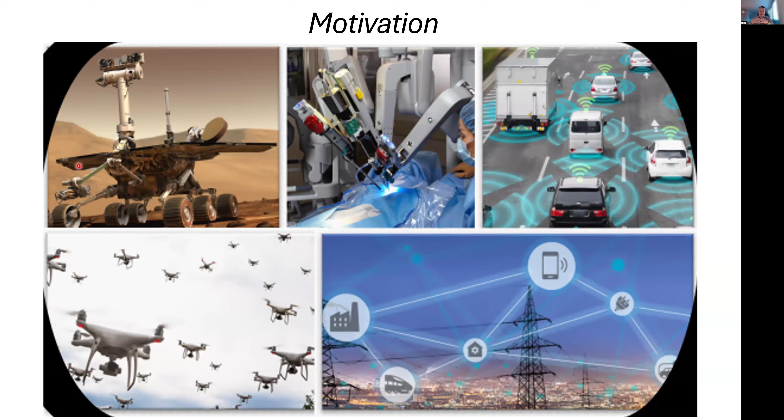So to start with the motivation: modern engineering systems are becoming more and more complex, penetrating through everyday life. There's a certain requirement where safety critical systems need formal guarantees when we design their controllers. These systems may be fully autonomous or semi-autonomous. They may cooperate with themselves, for example in an industrial plant, where you can educate your workers to cooperate with autonomous machines such that the machine can expect the human operator to behave a certain way.

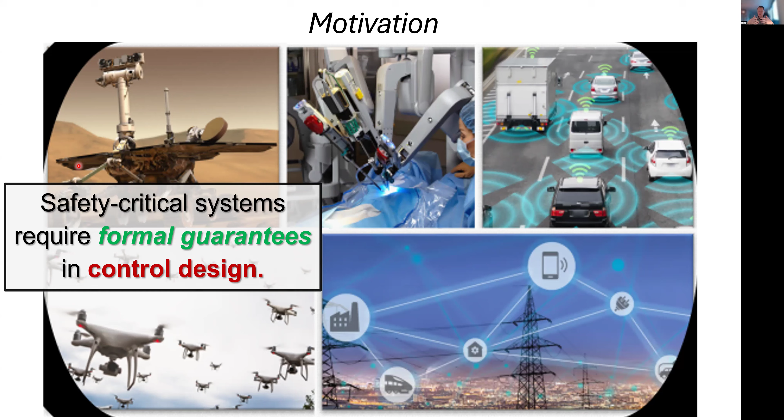Or it can just be a traffic network where you cannot expect cooperation. But in all of these cases, you want your autonomous system to safely operate in the presence of humans.

So the way I see it, to really achieve safe autonomy, there's a certain road, and I believe this is correct for most safety critical controls. To start with, everything begins at the theoretical foundations, and hopefully studying theory well gives us a design framework. Implementing these frameworks for particular problems and solving some computational issues, we get data. At the end of the data, I believe we'll see some gap between what we expect from our theoretical assumptions and what we actually get in practice. But I believe this is not a weakness, it actually gives us an opportunity to improve our design, so we can always go back to the theoretical foundations. So I believe this road is not actually a direct circle to safe autonomy, but rather a spiral with multiple iterations.

My talk will also reflect a similar structure. In the contents, I'll briefly talk about the theory, what I mean by the theoretical contribution. This is going to be formal safety and how we can verify this using control barrier functions. In the implementation side, I'll briefly talk about safety filter controllers, implemented on autonomous trucks, which give us a really good platform to show characteristics that we may see in any other autonomous system.

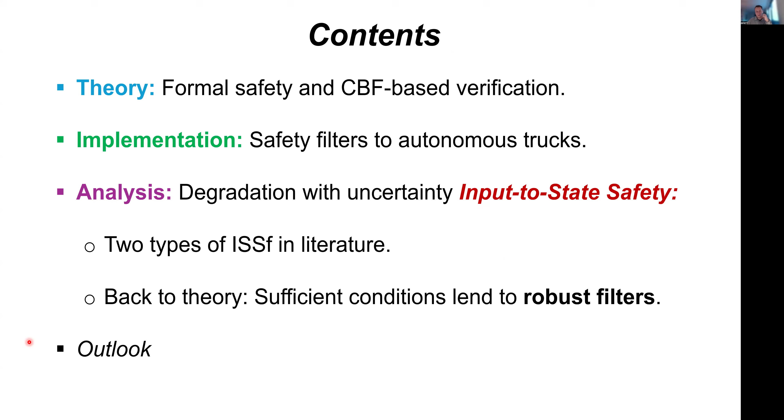So let's start with the theoretical foundation. We're going to talk about safety, so let's first settle down what we mean by that. We have this nonlinear system, and we work with continuous time systems. We have a set of initial conditions and also an unsafe set that we don't want to enter.

This is kind of a sanity check, making sure that the initial condition and the unsafe condition obviously cannot share some certain space. I'll name the solution of this closed loop system x of t, starting from a given initial condition. So the most basic safety definition is: for any point in the initial set, if throughout the whole realization of the trajectory you do not visit any of the unsafe states, then this is considered safe. But recently, a more function-based safety definition is becoming more popular, because if we can find a function that defines a certain set, we have to be careful—this certain set has to be a subset of the initial set.

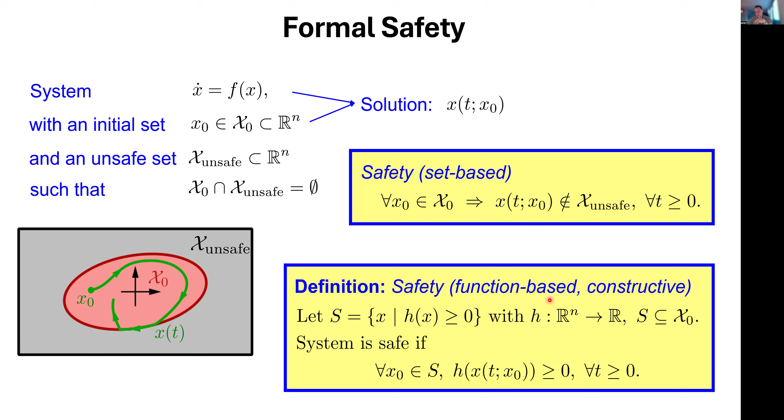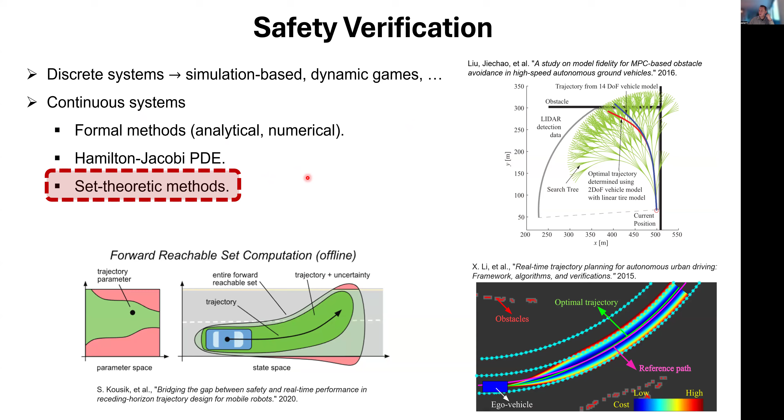Safety verification is a very well-studied topic in control. There are a lot of ways people try to crack this problem. In my research, I relied more on set-theoretic methods. What I mean by set-theoretic methods is when we study the properties of a system without having to calculate any of those trajectories, if we can get an idea whether the safety can be guaranteed or not.

Just by checking some certain property of the model, then we are in the set-theoretic field. This field was kicked off by the seminal work of Nagumo. You might have heard of it before in the context of safety critical control. It's very popular and basically formulates a very intuitive understanding. What it says is, on the boundary, if we can calculate these tangent cones, and if the system model is in the tangent cone for all the boundary points, that means the system trajectories cannot leave the boundary. So it has to go either inward or be along the boundary.

So this naturally leads to safety. This is a verification method, and throughout time there are other modifications to this theory: with the viability theory in the 90s and early 2000s, we have the barrier certificates that are very popular with hybrid type cyber physical systems. Eventually this leads us to all the developments in the 2010s with the control barrier function, which is now kind of consolidated under this brand name. So I'll talk about control barrier functions a little bit.

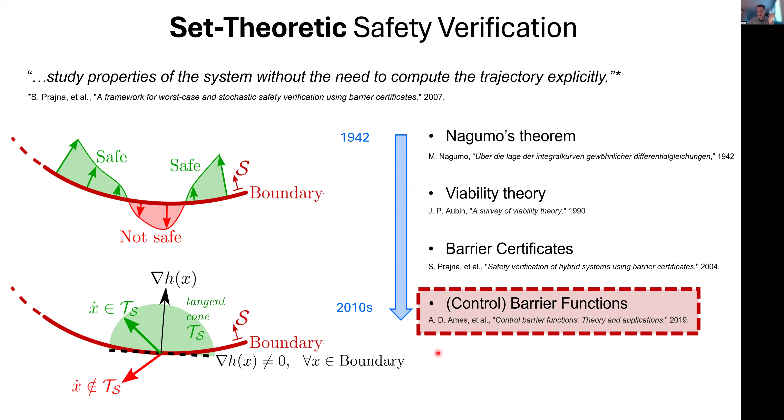The key idea is actually inspired by Lyapunov functions, where we have this positive definite function. If we can find a certain condition on the time derivative of this function with respect to the system trajectories, in particular if we can upper bound this, then we know that exponentially the system trajectories will approach the equilibrium. So this is the main idea.

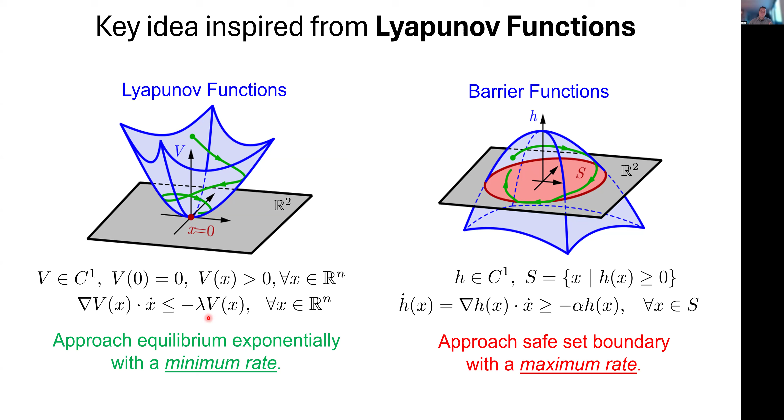What we can do is borrow this idea for the barrier function as well, with a slight modification. So instead of this positive definite function, you can think of it like flipping the function and moving it a little bit so that you create a set. The key thing is we can still use this function h such that if we can lower bound the time derivative of this function along the system trajectories, now what we can say is we allow the system trajectories to approach the set boundary, but at a maximum rate, and that maximum rate is diminishing. So at the very boundary, the system trajectory can either stay on the boundary or has to go in. This is the smart way of enforcing such a condition using the gradients.

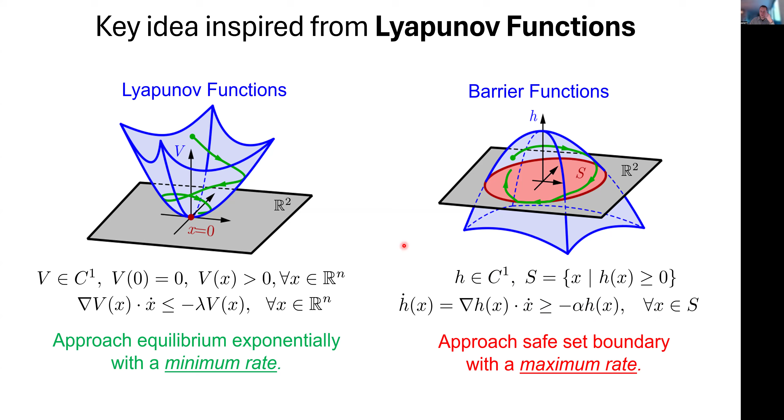This is kind of the theoretical structure that we rely on when we talk about control barrier functions. It allows us to construct all these nice properties and use this theorem. We start with the definition of control barrier function: it is basically, if this function is a smooth function - it may be a big if, I do understand that - and if we can find this class K function, which is basically a linear function that can work, if for every point in this set we can find a control that can be lower bounded by this function, that means this function is a control barrier function.

And this certifies that this problem of safety is actually solvable. Indeed, we can solve this problem by using the function and the model as well. So this F is the model. Now, I haven't introduced G yet - G is, I'm considering a control affine system here, so it is x dot equals f(x) plus g(x) times u. So it gives us a very clear condition to lower bound.

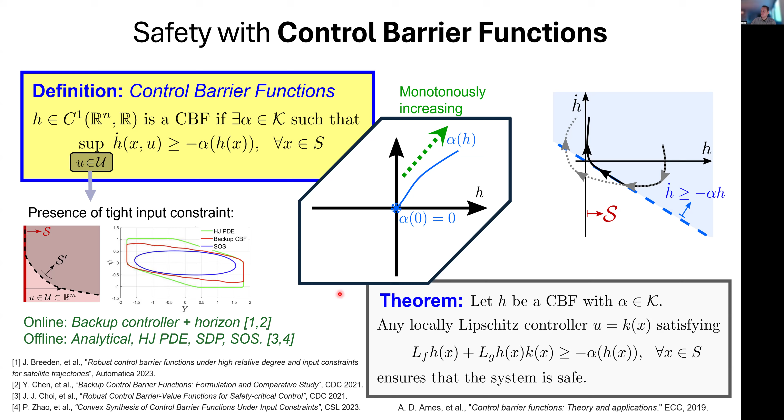Now, with these theoretical foundations, the control barrier function gives us a design framework. When it comes to implementing it, the most popular controller is called a safety filter. It's a very modular solution for safety critical control, and it's preferred because it takes a nominal controller, which can be anything - another optimal controller not considering safety constraints, a reinforcement learning controller, or even a human operator put inside the loop. This is why these filters are very popular in the literature.

Basically, the idea is you're penalizing the deviation from that nominal controller, because at the end of the day this is the controller you're trying to implement on your system. But you want to make sure the result of this optimization problem always satisfies the safety condition given by the control barrier function definition.

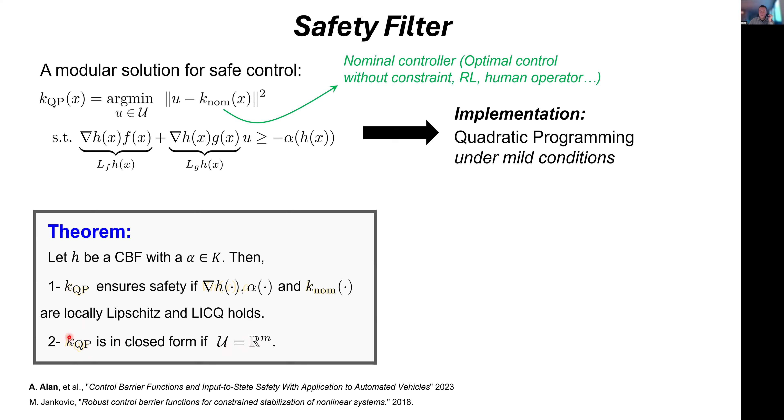But what's even better - it's actually a very practical assumption - is if you assume you have a large input bound and practically no other inputs, then this optimization-based problem has a closed form solution. You don't have to solve an optimization problem. This closed form solution for a single case is given here. I wanted to show it because intuitively it tells us something nice: the safety filter wants you to operate on the nominal controller as long as it's smaller than the safe controller calculated based on the Lie derivatives. So it's pretty intuitive by itself.

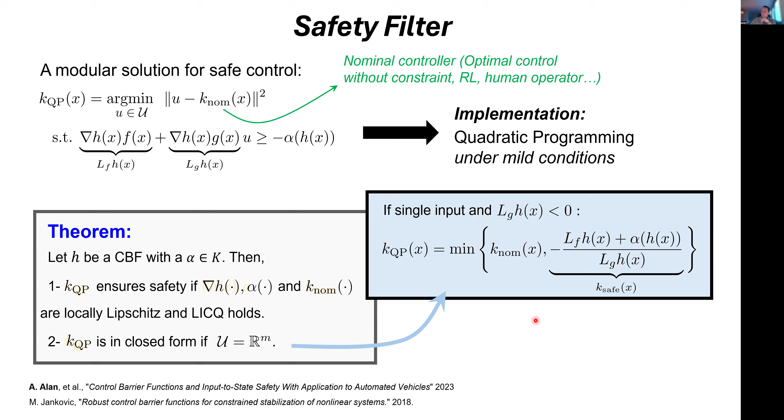Here I'm going over the implementation of this idea for a particular example: a safe car following scenario, where I'm designing a controller for the truck, and the truck is supposed to follow the leader at a safe distance. The distance is d, my speed is v, the leader's speed is v1, with acceleration a1. There are some certain limitations - I cannot use huge braking, and similarly, the other car cannot use huge braking either. So there are limitations I need to somehow consider in my control barrier function design.

Cruise control type controllers typically rely on this time headway based unsafe set, where we're not only trying to keep a constant distance from the other car, but that distance also changes with my speed as well. This is a very common type of safety assessment method in autonomous vehicle design.

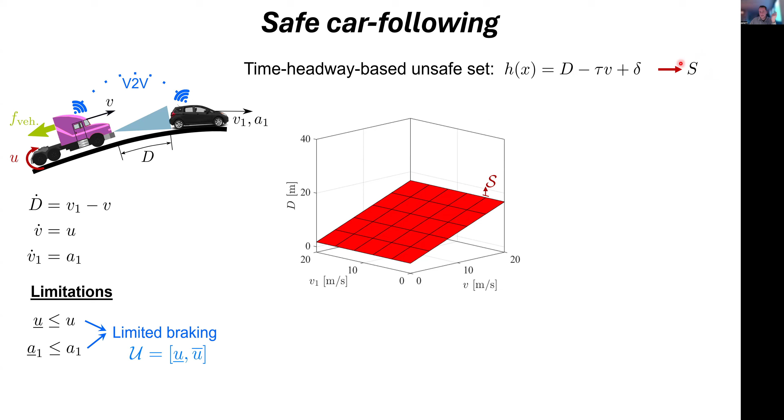If we take this set as the set S, we can incorporate these limitations by pushing this set a little bit higher, giving us an S prime set. Exactly how much you need to push at every point is a good question - this is kind of how you can construct these barrier functions. In my work, I used a quadratic type function where I can find parameters such that whenever I start from this other set and implement full braking, I should still be inside set S.

This problem is pretty easy - you can calculate these parameters using analytical solutions because it's a linear model and linear set. So it's not a big deal, but by no means is it a generalizable approach. For that, you have numerical approaches - you can use Hamilton-Jacobi, or another extension of control barrier function called backup control barrier function.

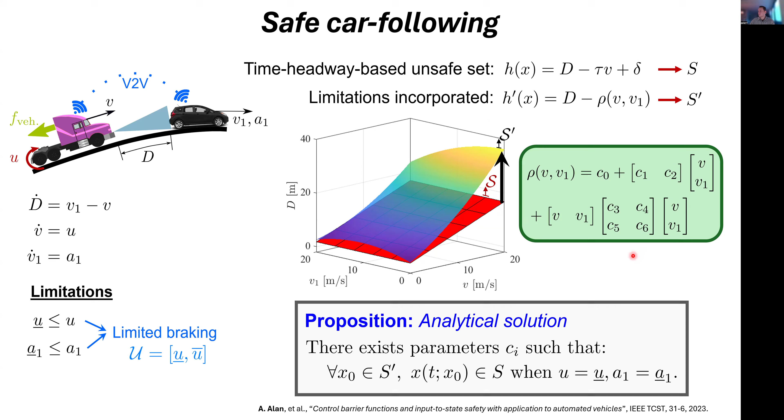So what we did is we implemented this controller onto the truck. It was a very easy implementation, and we actually took the truck to the public roads. You're going to see some videos of this on the highway, where the truck is running autonomously and running this algorithm.

The gas pedal and brake pedal are basically decided by the outcome of the safety filter, and none of the other cars are controlled by us. So this is uncontrolled traffic, basically. You have the radar cone you can see.

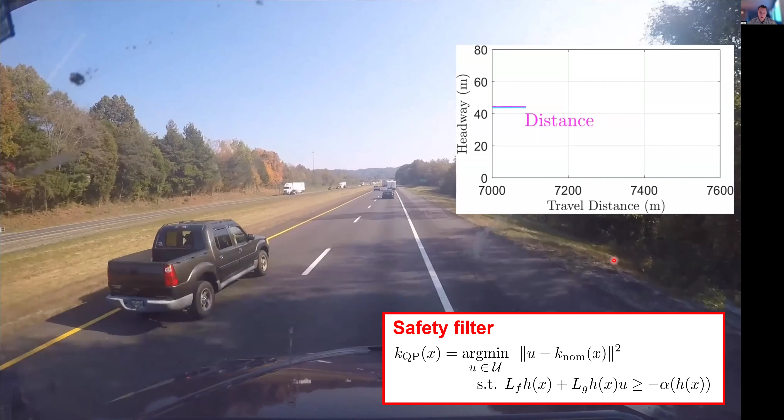And the headway plots with the purple show the distance sensed by the radar. When you see this cutting in, our safety filter was able to react safely so that you make a slight brake, not too much. You can adjust it using some nice parameters.

But everything works out really good on this mild driving conditions. But obviously this is not enough for us, so we want to push this controller as much as possible. So what we did is we took the truck into a more controlled environment.

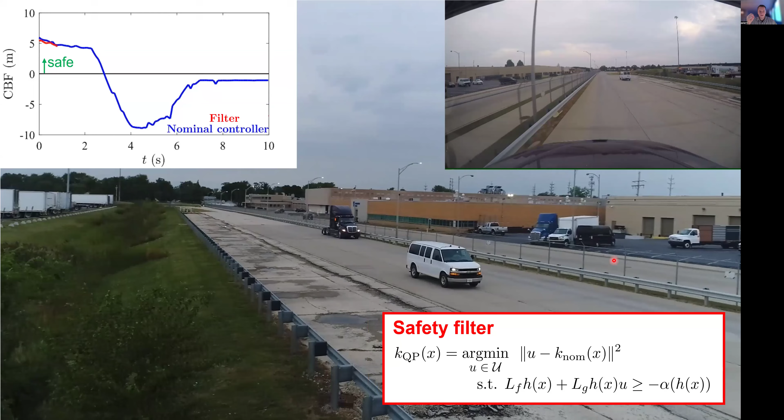We wanted to see if the other car makes a full emergency brake, how would the truck react? As you can see, we still have some distance, so there's no physical collision, but that's not enough for us as control designers who are after formal guarantees.

What is important for us is here. As you can see, with the way that we define safety, we wanted this function to be always positive. However, even with the filter, although I expect this to be positive, well, it goes negative. So there's a problem here. What is that problem?

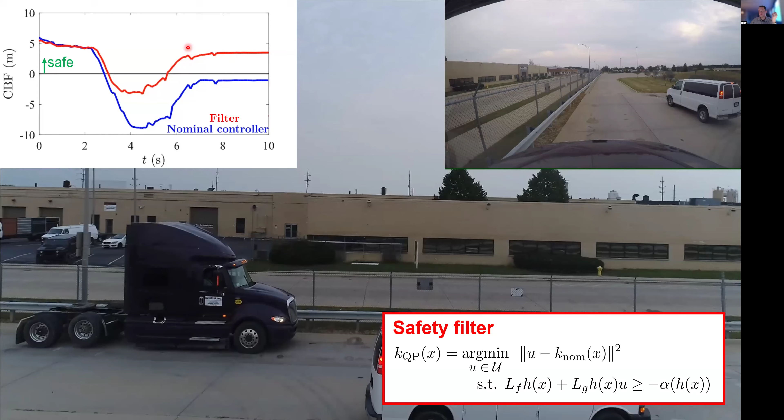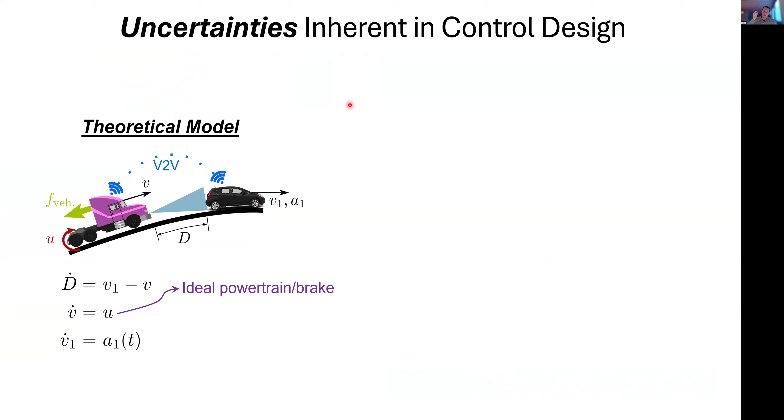The problem is coming from the uncertainties. No matter how detailed you model your system, you will have certain uncertainties, especially for this theoretical model. I just used a linear model, meaning my powertrain and brake are ideal, so if I command a brake, I get that brake right away. But what is actually running underneath the truck is very complex and complicated.

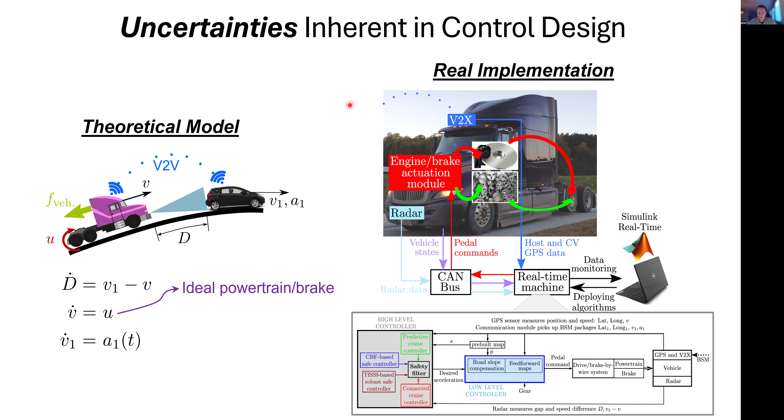Now you can obviously try to design every module on the right-hand side, but it's not very scalable, not very generalizable, unfortunately. So rather than doing that, what we try to do is consider whatever imperfection comes from the uncertainty as a disturbance to our control, and see if we can do something about it.

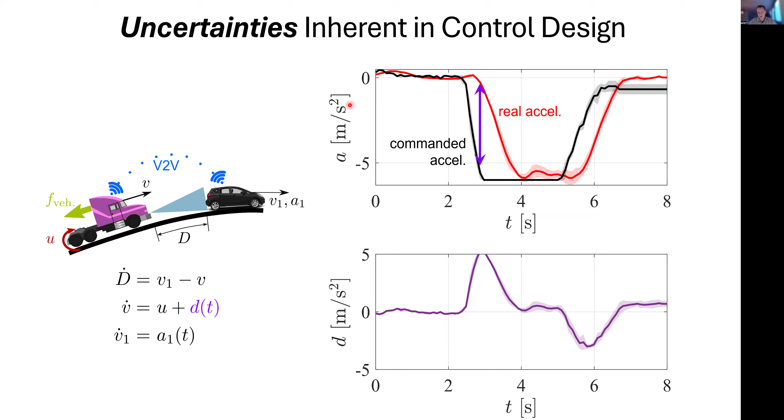This approach brings us to the last and I think most important piece of designing safety critical control, which is trying to bridge the theory with the practice. I believe this is a nice way to take a break, because so far I just talked about control barrier functions and safety critical controls.

So for anyone who hasn't heard of these type of controllers, you may have some questions. If you have any question, you can ask me. I think this will be a nice place, because from this point on I'm going to start talking about input to state safety and how we can get that property using control barrier functions.

And by the way, I cannot see if you're sending in a message. I cannot see messages, so if there's any message, right now there are, I think, no new messages. I have several questions, but they can be postponed till the end of your talk. If nobody has other questions right now, let's just continue. If there's any question, you can let me know whenever. Again, as I don't see the chat right now. Okay, great. All right, thanks.

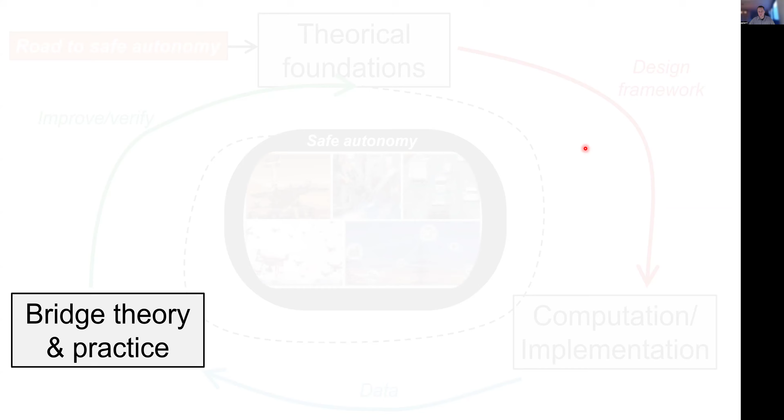As I said, this is kind of a nutshell of how to design safety critical control, or in particular, safety filters using control barrier functions. But now we have a more challenging problem at hand. Ideally everything should work, but in practice we always have certain uncertainties.

What we mean by uncertainties is we are using this gradient-based approach in control barrier functions, where we always want the system dynamics to point inward to the set so that on the boundary we don't have any safety issue. But with uncertainty, rather than just one vector, we have an array of vectors, so we want to make sure all of them fit inside the set.

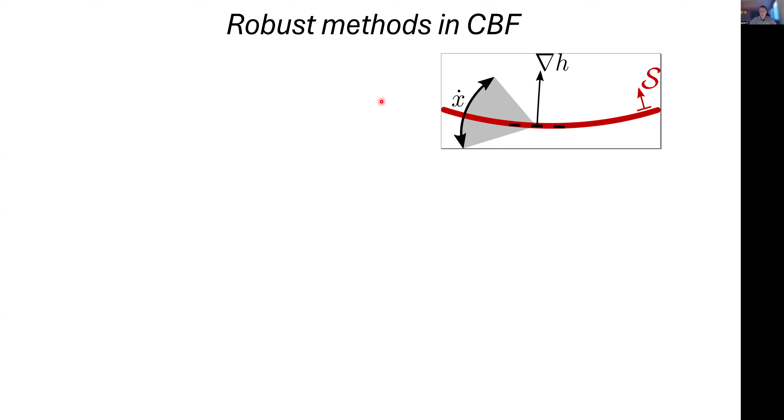There are different approaches to this problem. I would say the first one would be if the nature of the uncertainty is distributed and has a stochastic nature, then we have chance constraint control barrier functions, where the outcome would not be 100% safety, but it would be 100% minus epsilon type of uncertainty.

I will more focus on the deterministic type of uncertainty, in particular when the uncertainty takes values from deterministic sets or with the bounds deterministic. In this case, you can say that there are two different methods.

The first one is widely known as the robust control barrier function, where the main idea is to cancel the worst case at all circumstances. It makes sense, it's very intuitive. So you're trying to find the control that is going to eliminate the worst way the disturbance can affect your system, and if you have an idea, then you can basically do that.

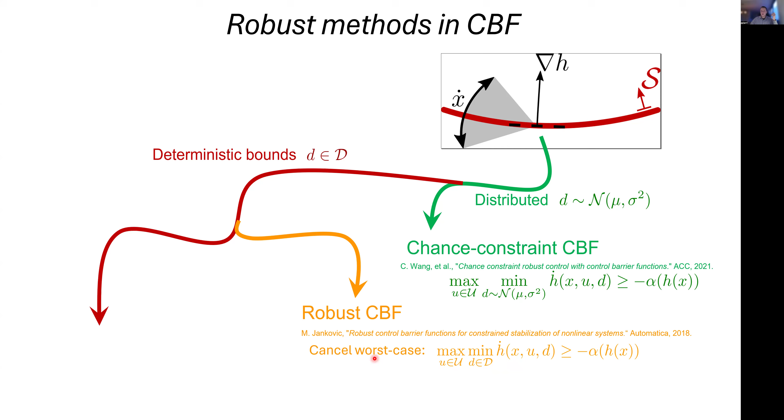But it may be hard for some systems. For example, if you have a very complex model and a very complex function, it can be hard to calculate this. Otherwise, maybe you don't have enough control authority to do that. So for problems like that, we also developed another branch, which is the input to state safety.

As you will see, this is coming from the input to state stability, actually. The idea here is, okay, what if we cannot really ensure this control barrier function condition, but rather we can get a graceful relaxation, which depends on how large the disturbance is. In that case, can we get some other formal guarantees how much the set or how much the violation can be?

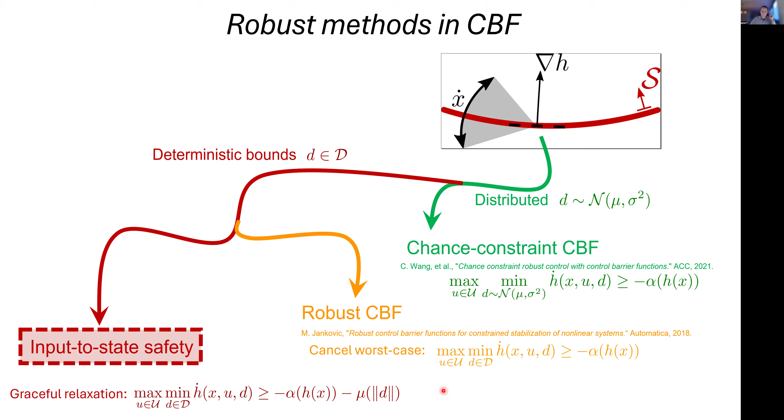So in order to be more formal, this is what I actually mean now. I have the disturbed control system, and I'm just taking the input disturbance for this case. It somehow makes things simpler, but you can also add another disturbance here that is directly coming to the system dynamics as well.

And I need to know that the disturbance is coming from a bounded set. So it is taken from these L infinity functions, which is bounded with this term, let's say D bar, obviously.

But the definition here is, first, I'm going to give you the robust safety definition, where the only change is highlighted with the red. Basically, now we are calling the system robustly safe if the original safety condition is satisfied for all D that can be realized from this set.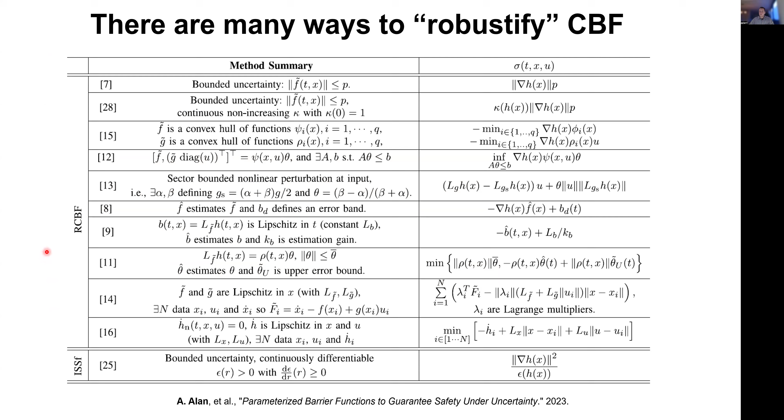These are really cool, but again I'd like to talk about the input to state safety, where what is different from the robust safety is basically we are looking for another lower bound on the right-hand side, where instead of this absolute zero, can we just relax this, find a certain representation with respect to how large the disturbance is.

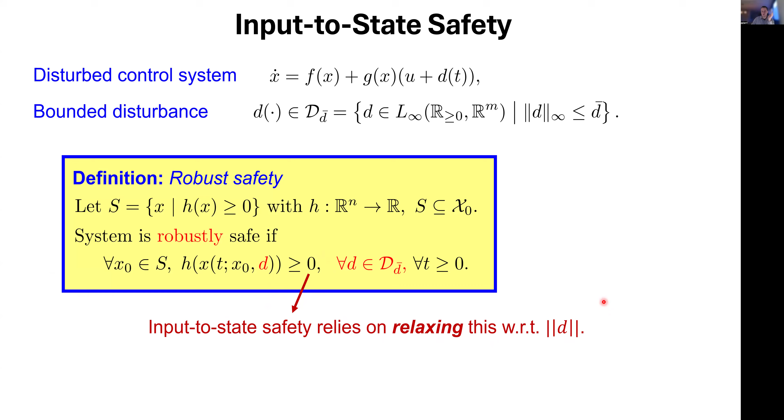So when we check the literature, you're going to see there's mainly two types of input to state safety definitions. The first one is basically more associated with the input to state stability. It has some temporal characteristics on the right-hand side. But there's some restriction. I don't really understand why it's defined that way. Maybe someone here may have a better idea, but I would really appreciate an explanation as well.

But I'm going to show you with the class K function, class double K function used on the right-hand side. It is somehow restrictive, so it wants the lower bound to basically increase in time. Whereas on the other hand, there's this type B type of definition.

It's easier to use this definition to construct controllers. It doesn't have any temporal characteristics, so for all the time, we have the same constant degradation.

We will use this type of definition to find some sufficient conditions that actually imply this definition. And I said this somehow includes type A, but you need to take this with a grain of salt, because the problems that they are constructed on are slightly different.

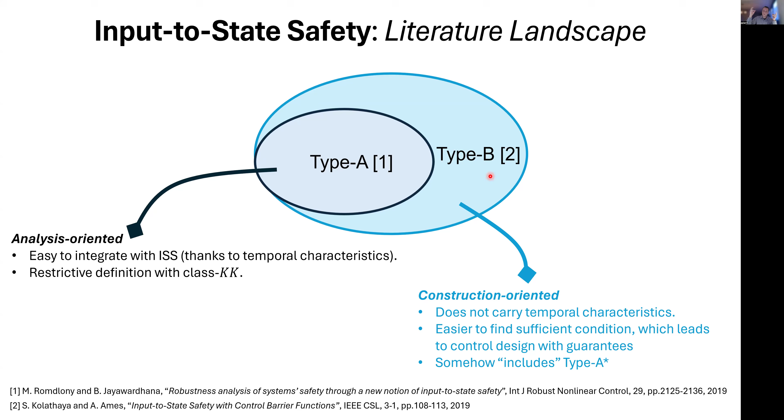So in type A, the safe set is an open set, and in type B the safe set is a closed set. So there are some differences there. But if you actually project the type of definition in type A, type B is somehow more general, and I will show it here right now.

Here's the formal definition of type A. We call the system input to state safe if you have two functions used to lower bound the system trajectories. The first is gamma, a class KK function, meaning both arguments are class K functions. Then there's another class K function, sigma, that is also used.

This type of bound naturally shows a characteristic like this because of the class KK property of gamma. Based on the second argument, as time moves on you would want a larger and larger gamma, so at some point it may cross. This type of temporal characteristic may make sense in terms of input to state stability.

As a matter of fact, they show input to state stability can be used as a sufficient condition with some other condition to get this definition. But I find this a little bit restrictive, because what if my controller has a property where it actually converges to this bound? In that case there's no way of representing this, so I find it restrictive.

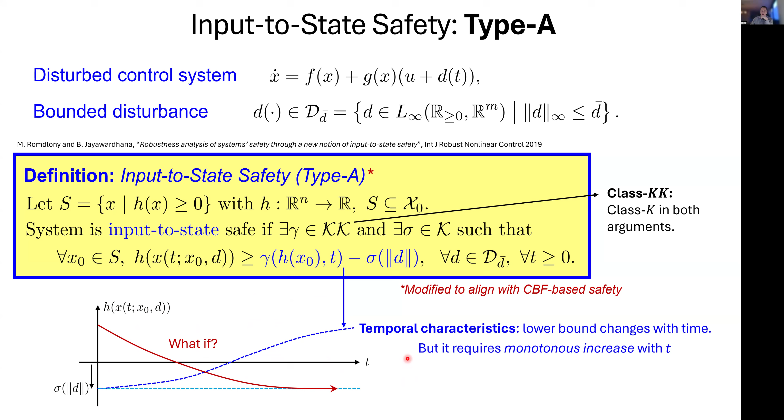This is why we typically use the second notion of input to state safety, where we don't have those temporal characteristics. We just push the zero absolute robust safety to a little degradation, characterized based on the sigma function, a class K function. If there's no disturbance, this is zero, and you get normal safety. But if it's large, you get a larger and larger deviation. This is the type of input to state safety I will talk about.

We can actually get a sufficient condition coming from the control barrier function, with a modification given here. If you add this modification to your CBF condition, you'll show you can get a sigma, given here, which can be shown to be class K. So it's a very practical way of showing a system is input to state safe, and you can also construct the controller such that the resulting closed loop system has input to state safety.

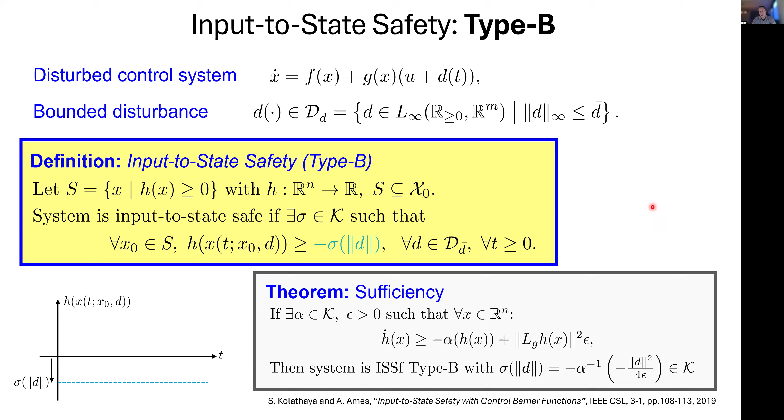This gives us a very easy to implement condition. So I changed something in the safety filter, and when I redid these experiments, what I realized is, yes, you are safe, but you're also very far away from the other car. That means this new addition is introducing a huge conservativeness. This is not acceptable at all — one of the things I discussed at the beginning: there's a huge difference between the theoretical guarantee and the practice.

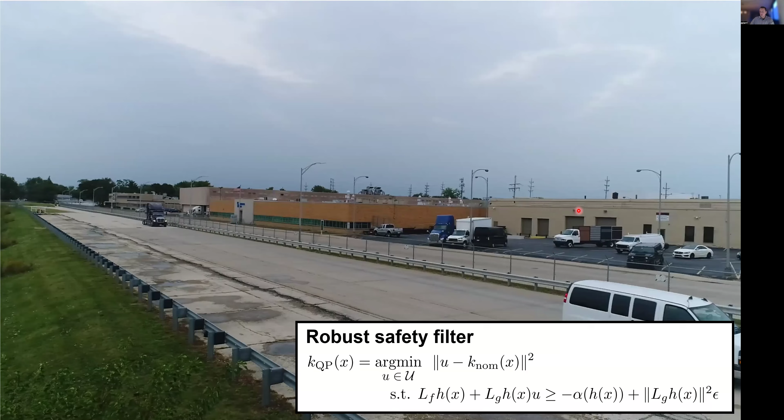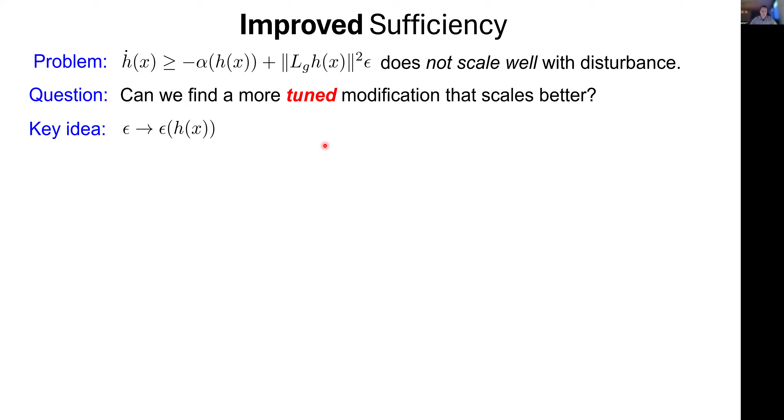Now I'll introduce another method to bridge this difference. This is the sufficient condition in the previous case — you can see it doesn't scale well with the disturbance. I'd like to find a better modification that accepts more characterization, so I can tune it based on how far I am from the safety boundary. For example, if I'm very far from the boundary, I don't really need this much modification. So instead of using a constant epsilon, I want to make it a function of h, since h characterizes how safe I am.

The whole theory is here — I'd like to go over it, but won't spend too much time. The idea is, if you can find a certain epsilon function, it needs to be continuously differentiable, and its derivative has to be non-negative, basically like an exponential function. So instead of a constant epsilon, if you use this epsilon on the right-hand side, you can still get the type B ISSF.

You can also get whatever sigma function will give you the degradation, but this time you cannot explicitly obtain it — it's the implicit solution of this function, shown here and here. You need to solve this equation, which is not a big deal, and you can use the implicit function theorem to show it has a unique solution and is also a class K function. So everything fits in the theory.

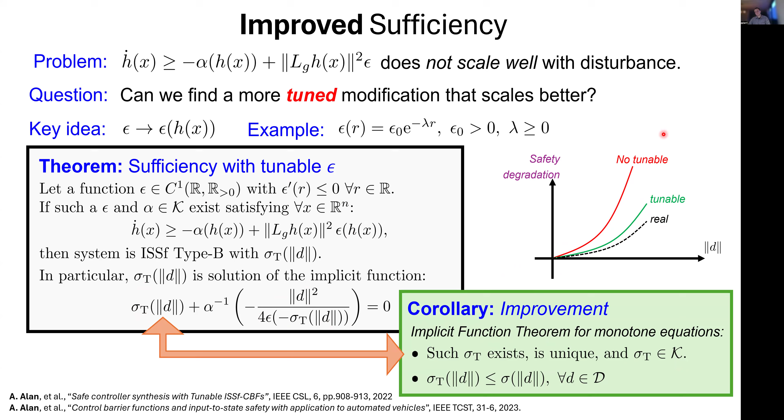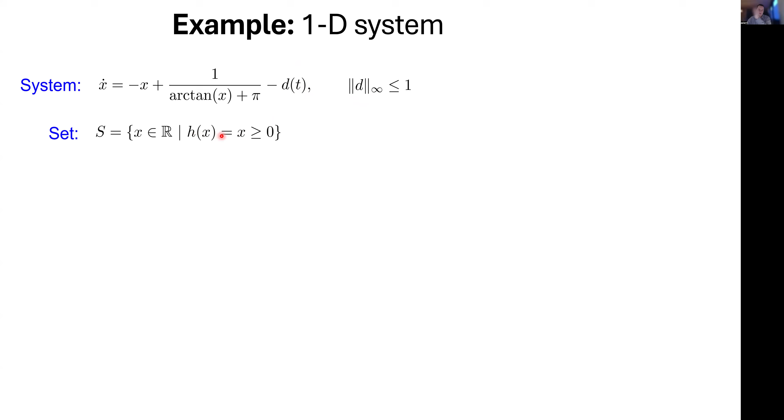We can show it in an example. Take this 1D example of nonlinear dynamics, and I'm adding a disturbance with a bounded value that can take a maximum of 1. The set is going to be just the positive values, so I try to stay on the positive values.

If I don't have any disturbance, I can use the barrier functions to show that it is actually safe, because this holds, and from any initial condition you will not leave the set S. However, if you introduce a disturbance, for example a sine signal, you're going to see there are instances where you leave the intended original safe set.

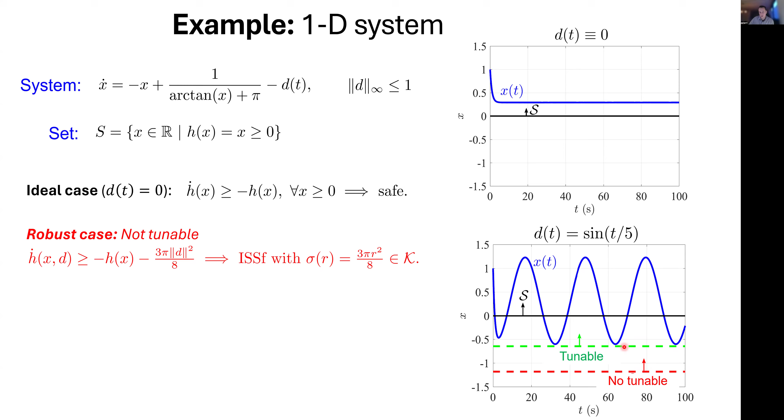Our goal is to find out how much this degradation is going to be. If we use the non-tunable version, we can make the calculations and find the residual term, and based on this residual term we can calculate a sigma function for how much it expands. This is what the red curve tells me. It does capture it, it is true, but as you can see, there's a huge difference between what is going on in practice and how much you get from the formal theory.

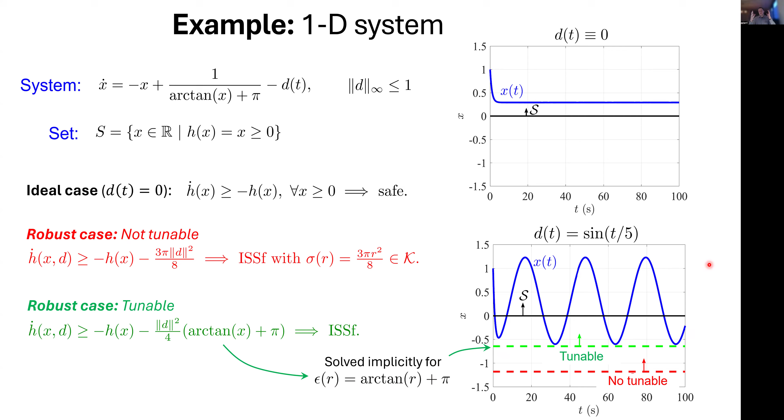On the other hand, with the improvement we introduced with tunability, you can have the flexibility to get a residual factor as a function of x. This ensures input-to-state safety, and you can solve that equation implicitly to calculate this bound. As you can see, this bound is way closer to the practical setup—a way to bridge theory and practice.

Now I go back to this chart because I believe input-to-state safety, and especially this tunable implementation, aligns very well with this landscape, where with the theoretical foundations we can get a formulation for safety-critical control.

We can compute and implement this in a system, and using data in the experimental setup we can get some estimation, and implement learning methods to understand what this disturbance is going to be. This can be integrated into this framework to update the parameters of the quadratic programming, so that iteratively, in an episodic way, you're getting better and better.

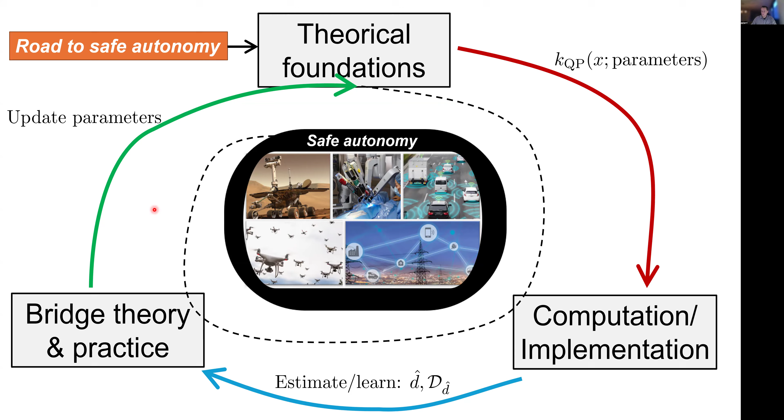So I believe input-to-state safety plays a huge role in this, and at the end of the day this is what we did with the truck as well. With the robust safety filter and tunability, we do have good performance, we have safety, and indeed we have safety in the data too. So this is the experimental setup where we showed that it actually works.

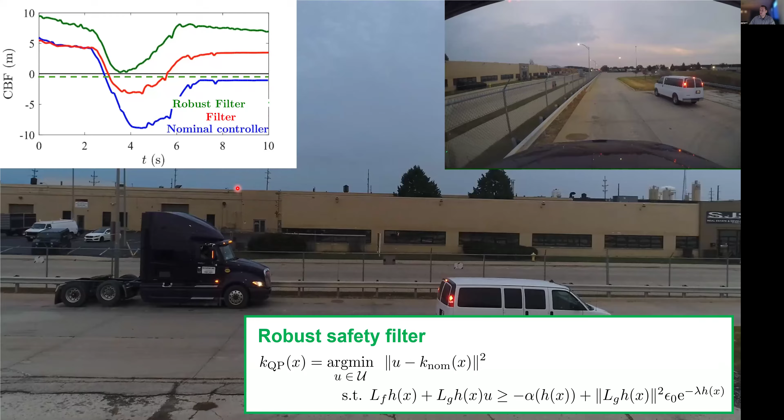With this, I'd like to finish on two things. First, the outlook. So far I talked about the fundamentals of input-to-state safety. But recently there's a push in input-to-state safety toward merging it with complex systems—using input-to-state safety to understand and analyze the behavior of complex nonlinear systems when it comes to safety.

The first line of work, I would say, is switched, hybrid, and event-triggered systems. I've seen some papers, and as you can see, these are pretty new.

The other direction, which I think is more promising and I'd like to spend more time on, has a counterpart in input-to-state stability as well. We can maybe find ways to give us input-to-state safety in a more scalable way—if you have a large network of connected systems, by analyzing some sub-part of that whole system, maybe you can tell something about how the whole network behaves. There are some works on that as well.

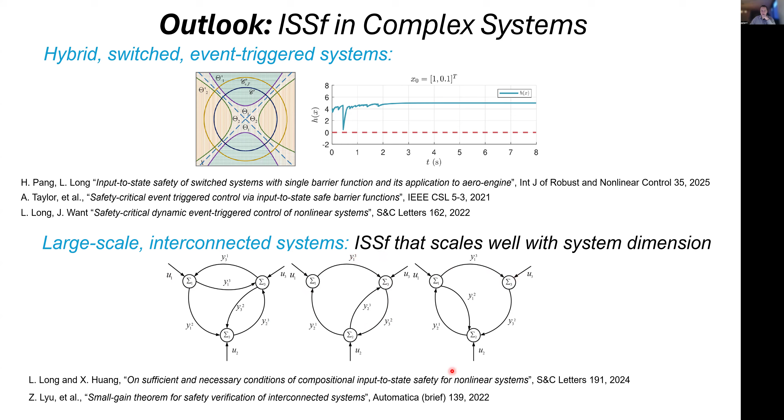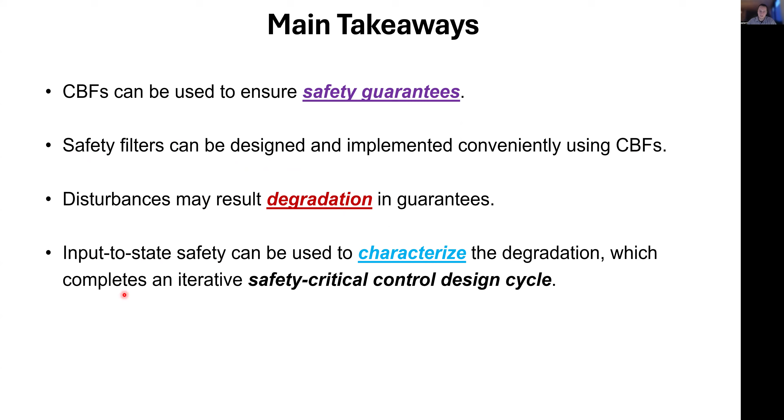This is the main takeaway. I think I've pretty much explained what I wanted to talk about. Control barrier functions, I think, are very promising in guaranteeing safety. We can use safety filters using CBFs, but disturbances are something we have to deal with because they cause degradation, and how much this degradation can be characterized by input-to-state safety. I think this whole idea completes an iterative safety-critical control design cycle. With that note, I'd like to finish and thank you for listening to my talk.